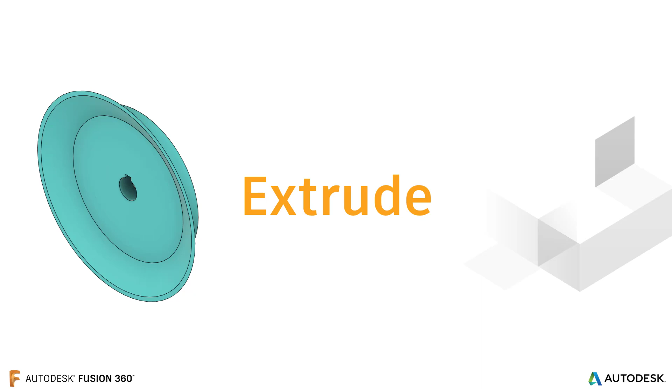In the Design workspace, the Extrude command adds depth to a sketch profile or a face on an existing solid body. Extrude is a versatile tool that can create new solid bodies, or quickly add material to or remove material from existing solid bodies. Let's use the Extrude command to create the starting shapes for a simple component in an assembly.

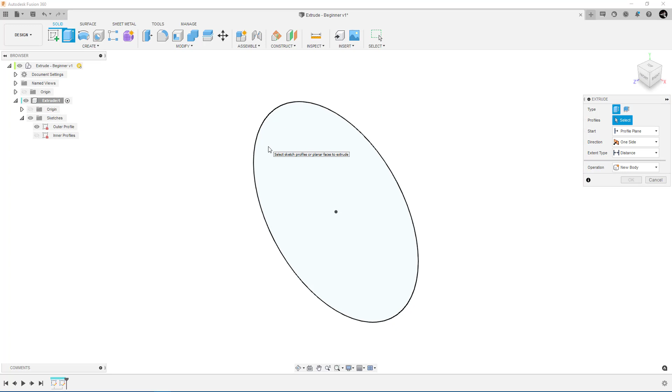On the toolbar on the Solid tab, click Extrude. The Extrude dialog displays, and if there is only one sketch profile in the design, it is automatically selected for you. Otherwise, select the sketch profile you want to extrude. You can drag the distance manipulator handle in the canvas, or specify a distance in the dialog.

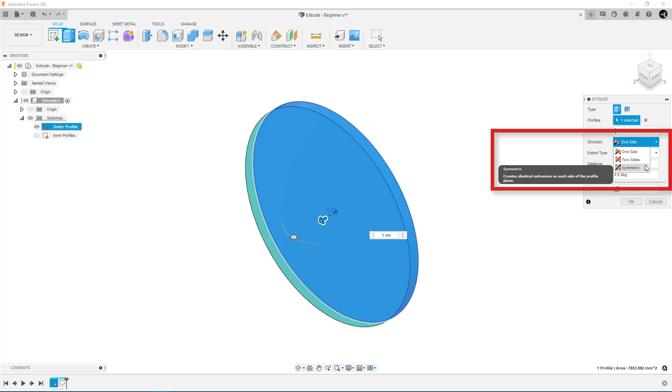For symmetrical objects, you may want to switch the direction setting from one side to symmetric. This lets you extrude the same distance to each side of the sketch plane, so that it acts as a symmetrical construction plane as you evolve your design.

When you extrude a sketch profile that doesn't interact with any other geometry, the operation type is set to create a new body in the active component. When you click OK, the dialog closes, and the new solid body displays in the canvas and in the browser within the Bodies folder in the active component.

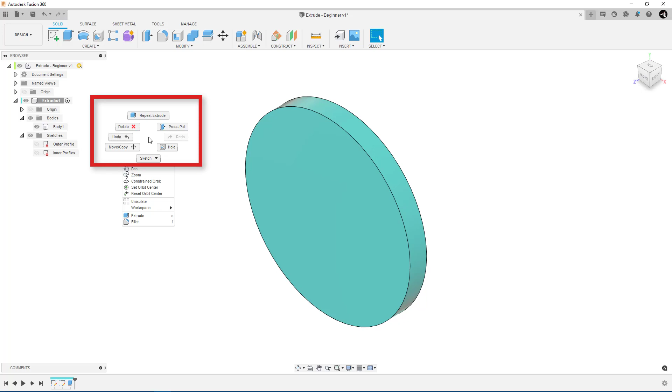You can also extrude thin features from open or closed sketch profiles or faces on an existing solid body. Right-click in the canvas to open the marking menu, then select Repeat Extrude. Then select a face on a solid body in the canvas. Select the thin extrude type.

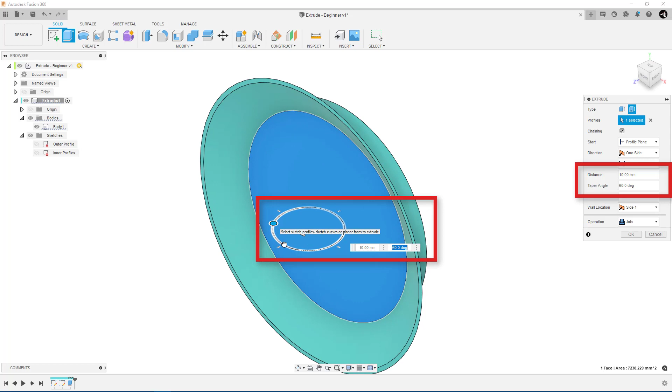Drag the distance and angle manipulator handles in the canvas, or specify exact values in the dialog to adjust the distance and taper angle of the thin extrusion. You can adjust the wall thickness and its location in the dialog. When you extrude a face in a direction away from the existing body, the operation type is set to join the new feature with the existing body.

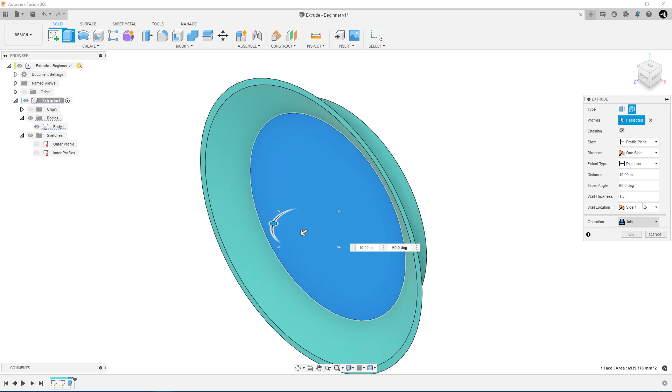When you complete the Extrude command, the new geometry becomes part of the existing body in the canvas and in the browser. However, the thin extrude feature is added as a separate feature in the timeline. You can also use the Extrude command to remove material from a solid body. Press E on the keyboard to start the Extrude command again, this time using its keyboard shortcut.

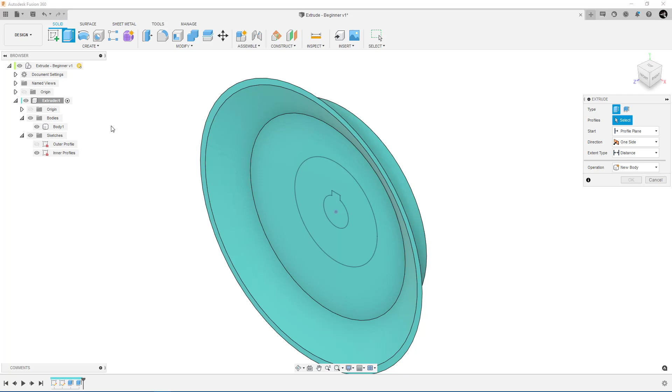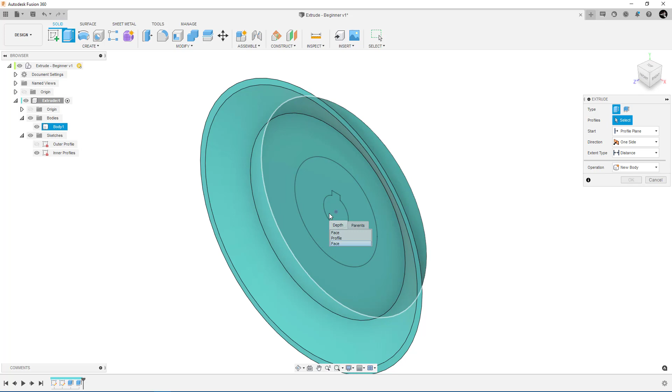Select the sketch profile or face on a solid body in the canvas that you want to remove material from. If the geometry you need to select is obscured by other geometry, left-click and hold down the mouse button for a moment. A context menu displays a list of all the geometry layered beneath that point. As you hover over each item in the list, it highlights in the canvas to help you select obscured geometry more easily. Click an item in the list to select it.

Drag the distance manipulator in the canvas. When the new extrusion overlaps an existing solid body, the operation type automatically switches to Cut, and the area to be removed from the existing body is highlighted red in the canvas.

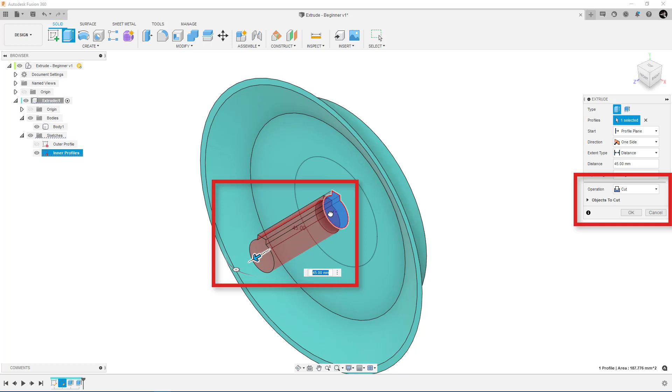Click the flat faces on the view cube, like front, top, or right, to switch to any of the orthogonal views. Adjusting the view can help you validate that you're making accurate adjustments to your design in real time. For instance, if you know you want the cut to remove any material in its path, even if you change the shape of the body in the future, you can adjust the extent type setting from distance to all.

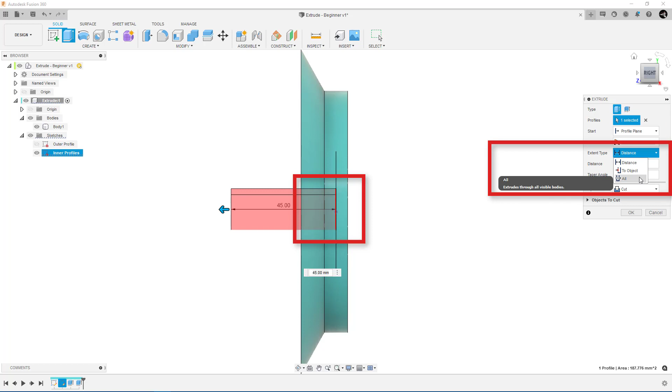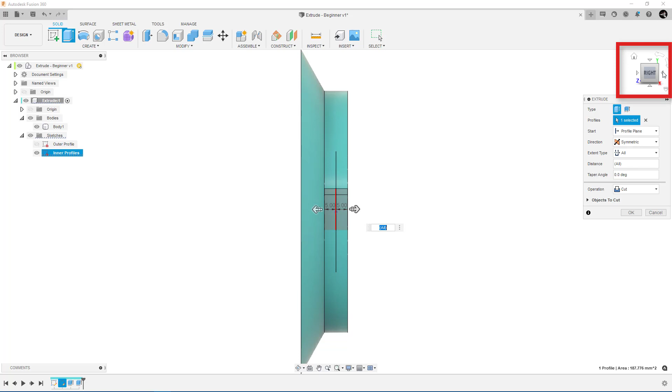If you're modifying a body that was created symmetrically, you can adjust the direction setting to symmetric, and the extrusion will cut through all the material on both sides of the profile plane. Click the arrows on the view cube to rotate the view by 90 degrees in any direction, and inspect the body to ensure the material you're removing with the extrusion is exactly what you intend to remove.

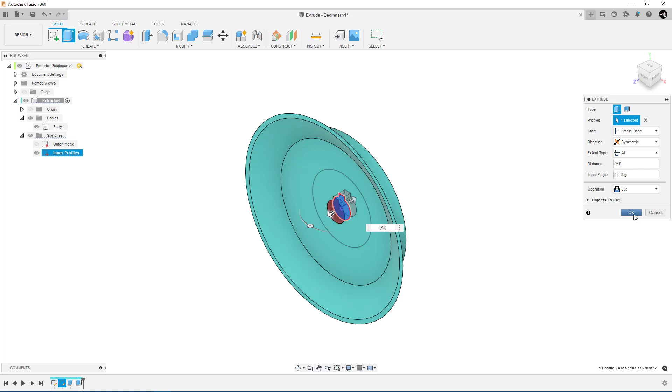You can also click the corners of the view cube, or click the home icon to view the design from an isometric angle. When you're happy with the result, click OK. Although all three extrusions are part of the same body, they appear as three distinct extrude features in the timeline, so that you can modify them and use them separately as you evolve your parametric design.

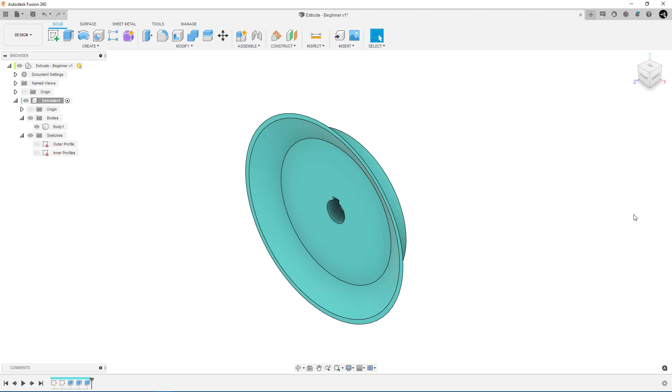Now you know how to use the basic features in the Extrude command to start creating solid bodies from sketches in your own designs in Fusion 360.